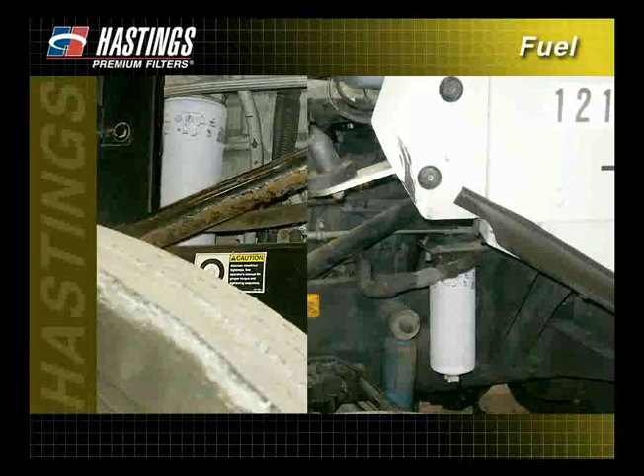Some diesel fuel systems use primary and secondary fuel filters, while other systems operate with only a single filter. Certain other systems depend on a fuel filter as well as an optional fuel-water separator filter.

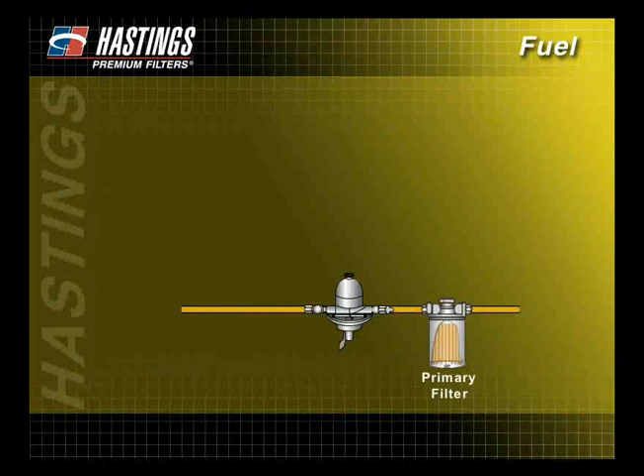Primary filters typically have more open and less restrictive media. They are built to capture large particles and to permit greater flow of fuel. The main responsibility of the primary filter is to protect the fuel pump from contaminants. For this reason, the filter is usually mounted before or on the vacuum side of the fuel pump.

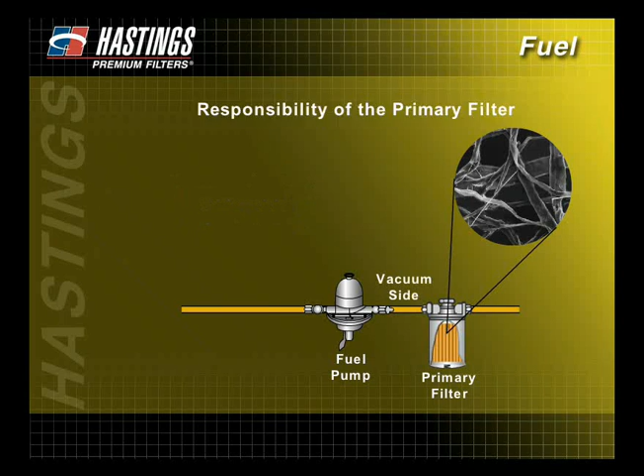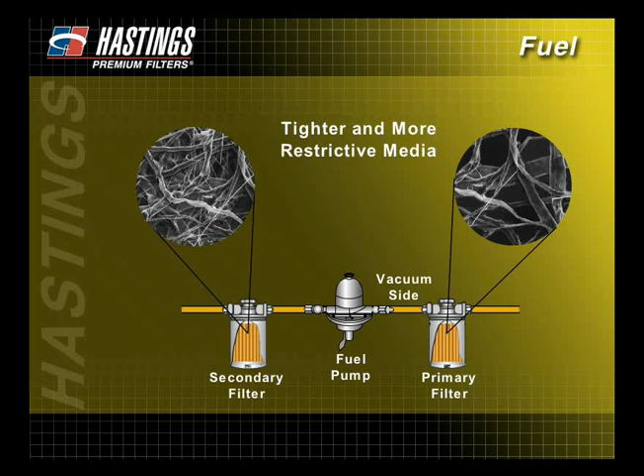Secondary filters have tighter media than primary filters and are designed to capture finer contaminants that often damage the injector tips and the injection pump. When a secondary filter is being used, it is located after or on the pressure side of the fuel pump. If only one filter is used, it is normally found on the vacuum side of the fuel pump.

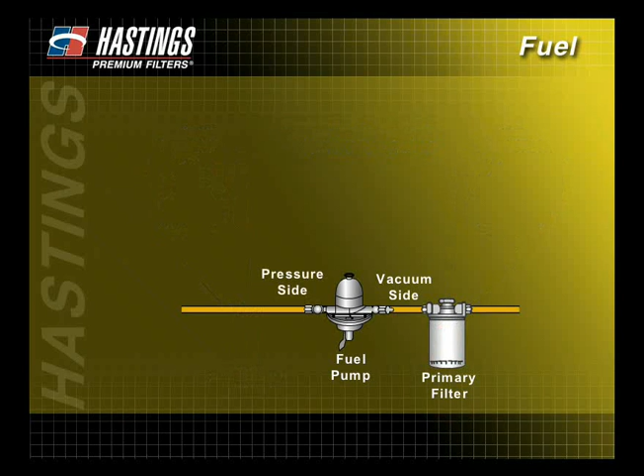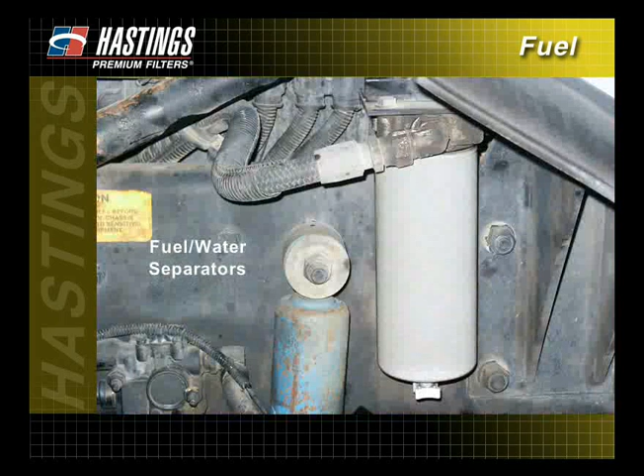While optional on many systems, some engine manufacturers require the use of fuel-water separators, which serve the same purpose as primary and secondary fuel filters. In addition to removing contaminants, fuel-water separators are used to strip water from the fuel.

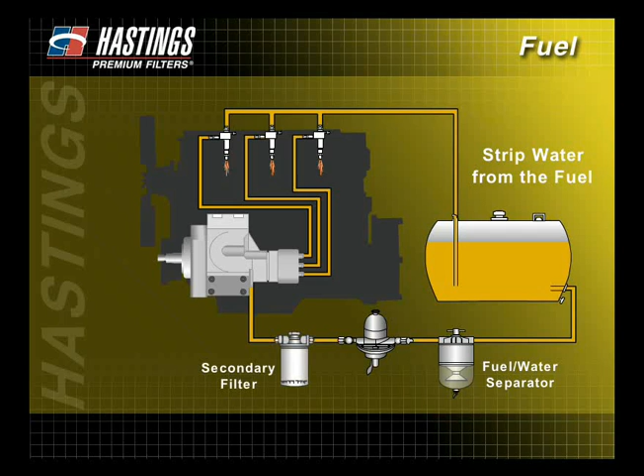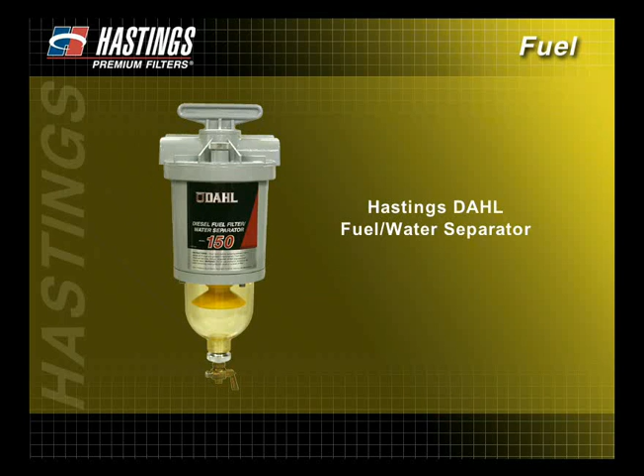Fuel-water separators can be used either as a standalone filter or as a primary fuel filter along with a secondary fuel filter. The Hastings Dahl fuel-water separators offer an additional line of defense for applications where significant amounts of water need to be removed. These units use a three-step process to remove water and contaminants.

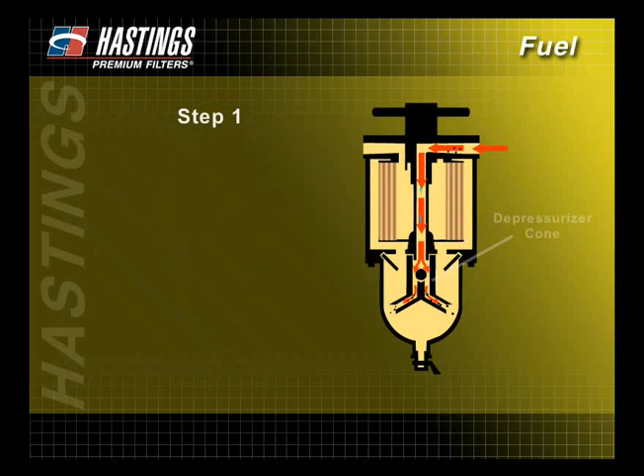When the fuel flows into the Dahl unit, it is spread out by a depressurizer cone. As the fuel leaves the cone, approximately 80% of the water and large contaminants are removed. The fuel then rises, coalescing water droplets on the cone and baffles.

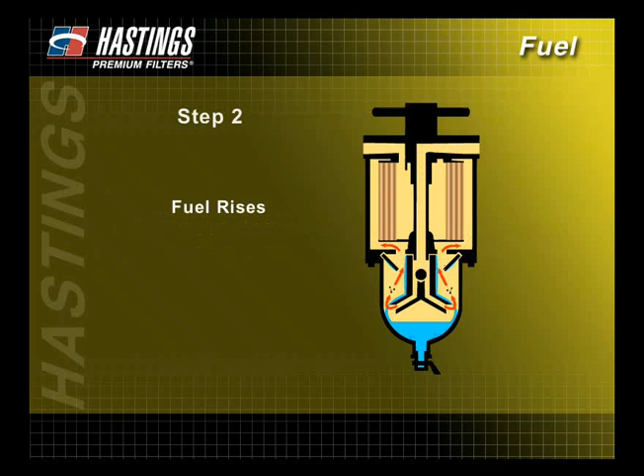These droplets are heavier than the fuel itself and fall to the bottom of the bowl. The water and contaminants can then be removed through the drain valve. The fuel then flows through a filter, where additional smaller contaminants are removed.

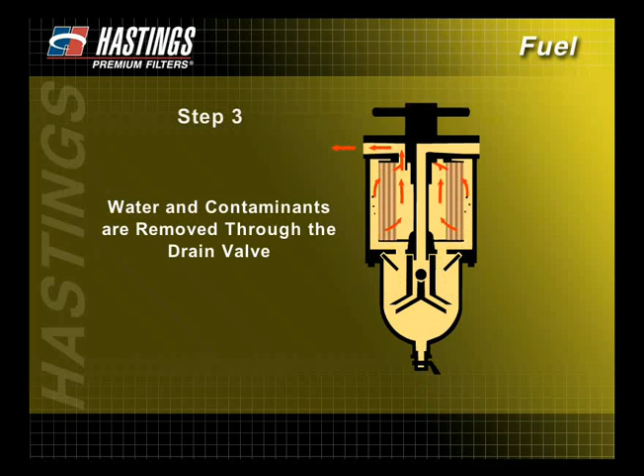To better understand how a fuel filter, as well as a fuel-water separator works, let's take a look at the components of a typical heavy-duty fuel-water separator.

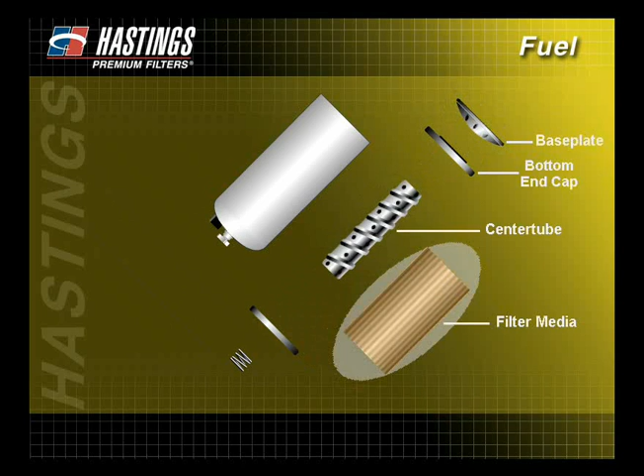The primary components are a base plate assembly, a bottom end cap, a center tube, the filter media, a top end cap, a compression spring, a self-venting drain valve, and the canister.

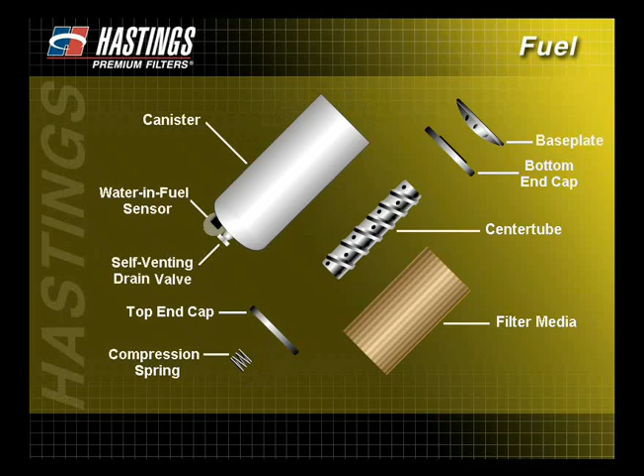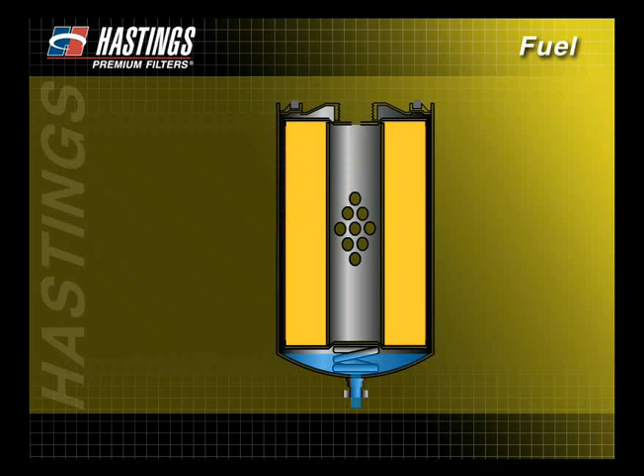Some fuel-water separators contain a water sensor port for the use of an electronic water-in-fuel sensor. Fuel enters here, is filtered through the media, passes through the center tube, and into the engine. On fuel-water separators, water that is collected during this process is released by turning the drain valve.

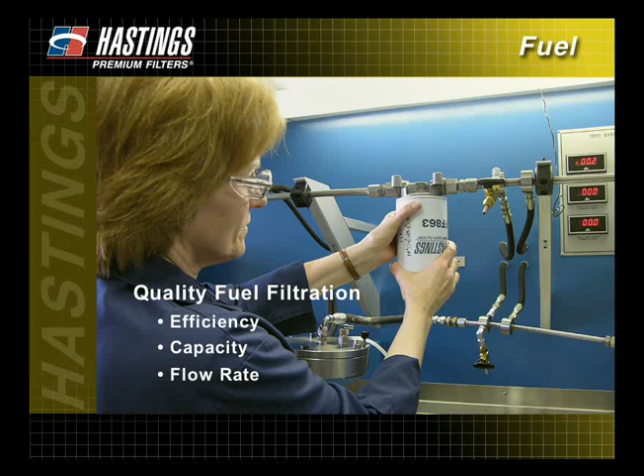To ensure quality fuel filtration, Hastings utilizes industry-standard test procedures to determine efficiency, the removal of contaminants, capacity, the storing of removed contaminants, and flow rate, the ability to move fluid through the filter. Using these industry standards helps ensure quality fuel filtration.

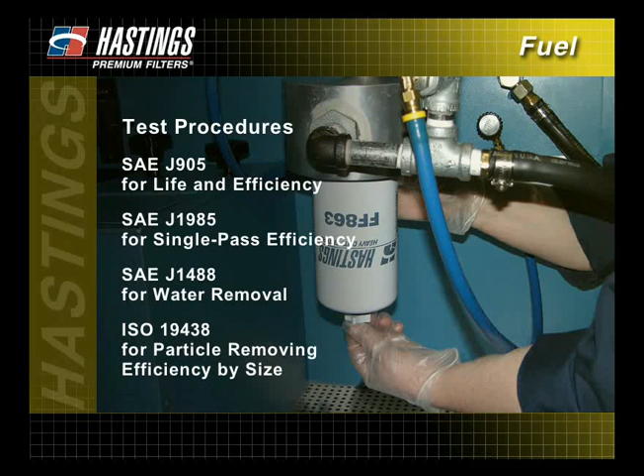The various test procedures used include the SAE J905 for life and efficiency, the SAE J1985 for single pass efficiency, the SAE J1488 for water removal, and the ISO 19438 for particle removing efficiency by size. Be sure to request comparative test data when comparing similar products from different filter manufacturers.

When choosing a fuel filter, consideration must be given to the filter's efficiency as it relates to its capacity. A filter with high efficiency often means reduced capacity because the media is more restrictive to flow. The life of the fuel filter will be shorter because it captures smaller contaminants.

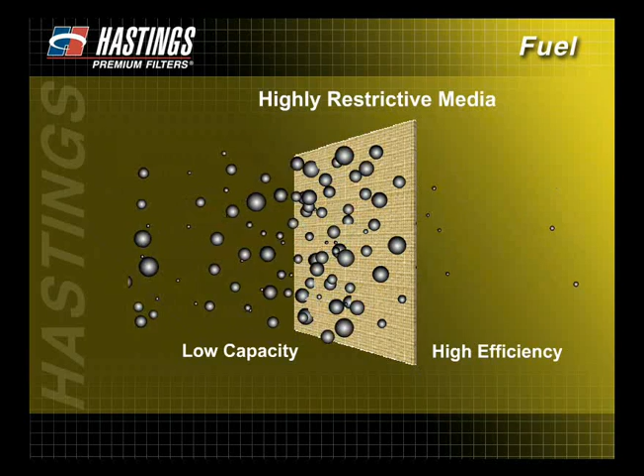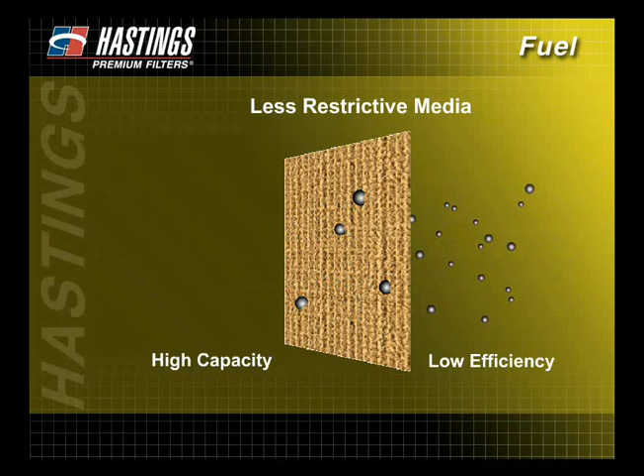A filter with high capacity often means reduced efficiency because the media is less restrictive to flow. The life of the fuel filter will be longer because it allows smaller contaminants to pass through the filter media. In both situations, you'll find a middle ground between efficiency and capacity is desired.